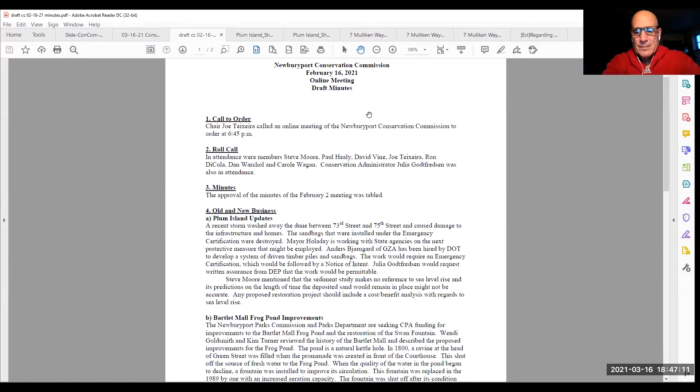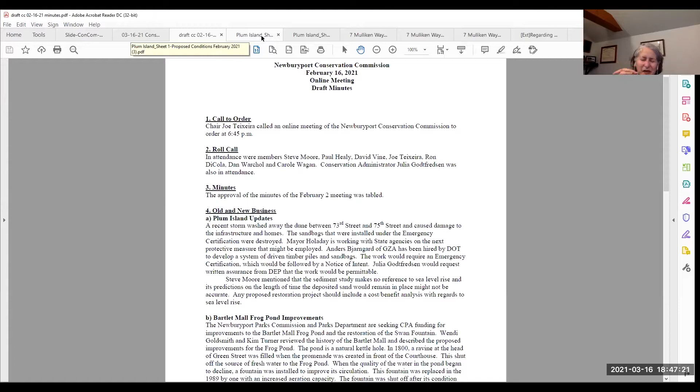All righty, next item, where am I looking at this? The Plum Island updates are going to equal the, I think, the Reservation Terrace erosion presentation. Yes, so. Okay, so we have with us tonight Mayor Holaday and Anders Bjarngard from GZA, who will be available. I believe Councilor Zaid is here too. Mayor Holaday and Anders were prepared to give a short overview of the proposed project out on Reservation Terrace.

So let's see, I'm going to make sure that they're unmuted. And I'll move to the draft plan. So we had a meeting last week with Mayor and Anders to go over this draft plan, which some of the neighbors have already seen in a meeting we had by Zoom on Friday. But Anders, if you're here, or Mayor Holaday, do you want to give a little presentation?

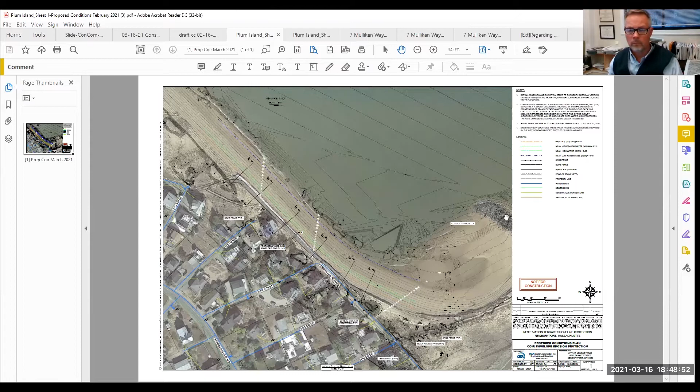Let me just start briefly, and first let me just hold on one sec. There we go. First of all, let me just express my apologies for not sending out the Zoom to any members of the Conservation Commission for Friday. There's just been so many meetings and so many moving parts on this. It just was an oversight on my part, and I apologize for that. The meeting was recorded so that it is available to view.

But we've been before you to talk about super sacks, and they did help in terms of the damage that could have occurred out on the Reservation Terrace area, but they certainly did not perform the way we had anticipated. Even though we finally were able to get the state DCR at the table to talk about what has happened for years on this property, even though we attempted that probably 5-6 years ago when we brought legislators and the world out to walk the site when we still had a dune there. And it's unfortunate that we didn't move faster at that time, because we wouldn't be in the situation we are in.

Even a year ago November, when I had predicted we would be here, we brought MEMA and the state and DEP and the world to a meeting in the conference room at the wastewater treatment plant, and then a site walk. And everyone stood there saying, oh, this is so awful.

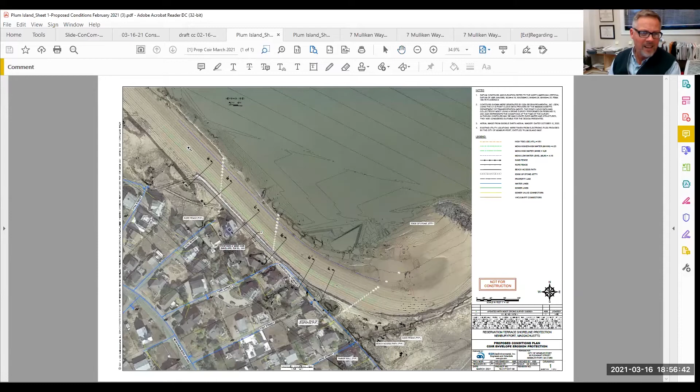Julia, if you could go—let me first just explain the limits here. It's a little bit hard to see, but there's a gray line. Thank you for zooming in. And it basically follows the former sandbag barrier. It goes a little bit past it on the southeast end there, down by sections E and F.

And what we're doing is we're tying into the higher remnant dunes there and terminating the barrier at those locations at the north. So the overall length is about 510 feet.

One of the things here, we're using contours that were generated from MassDOT's drone flyover. So you see some funky lines over the water—that's because they're getting reflection—and also some funky lines from structures over here. But the topo on the beach is good, so that's what we're using.

That topo indicated that we had lost, no surprise, some additional beach since the last time we surveyed out there last summer. So please note these cross sections here, A through F.

I'm going to go to the profile sheet, Julia, if you would, and just show you what that looks like in our proposed design. So from top to bottom, you have cross sections A through F, and A and F are basically where they tie into the existing dunes.

So the majority of the installation is represented by these sections in the middle, sections B through E.

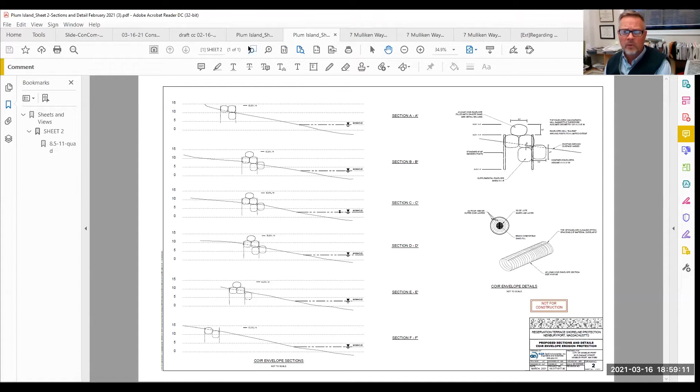In the upper right-hand corner, you can see a slight blow-up of the installation. That dashed line that slants from left to right, that's existing grade. So everything that's shown below existing grade is dashed.

So these envelopes are lined, they line the excavation and they backfill the sand. Sumco went out there and took a look at it. They feel that there's plenty of excess sand stockpiled along Reservation Terrace to fill these bags. However, the plant, they've already provided us with a unit cost to be used for imported sand if that's needed.

And we're trying to hold this elevation of 14 at the top, and that's maybe not as high as we would like for overtopping protection, but to go higher with the way the beach is lowered right now would basically take another row and another pyramid. So you'd be looking at 3 more envelopes at a minimum to get up to around elevation 17.

That would help a lot for overtopping, but it just expands the project to a point where you'd have to question the cost and the fact that it's a short-term measure, whether that makes sense or not.

For comparison, this is about where the super sacks ended up. It was about elevation 14. So the level of, or the amount of overtopping, would be comparable to what we had with the super sacks.

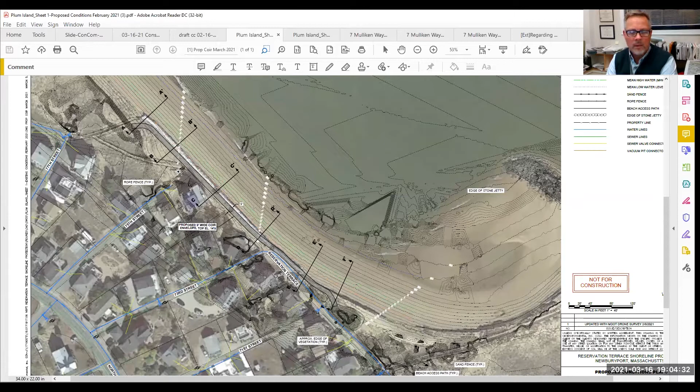So yeah, I hope that answers your question.

Well, I thought right around 73rd Street, I thought the concrete blocks were basically right on the edge of the pavement. They are there, yes, you're right. And they're more aligned with the back of our barrier.

Okay, so if you see the, northwest of 73rd, they're along the front side. But then as we have to swing out to miss the water line there, they ended up on the back.

And I would propose that we would put the blocks back in approximately their previous location, but underneath the middle of the sand barrier in that location.

So if you want to go back to the profile, Julia, one more time, that might take that supplemental envelope that you see on the bottom in the middle, and that could be replaced by one of the old concrete blocks. So what would be supporting your 3 rows of sand, the left-hand one, which if the concrete blocks are where the bottom is, what would be supporting that upper one?

The upper one on the left there would be supported by sand.

Wouldn't the coir bags be more stable than the blocks in a situation like that? Because they're longer and heavier? They're not heavier, but they are continuous. And this is one of the big differences between this approach and the super sack approach.

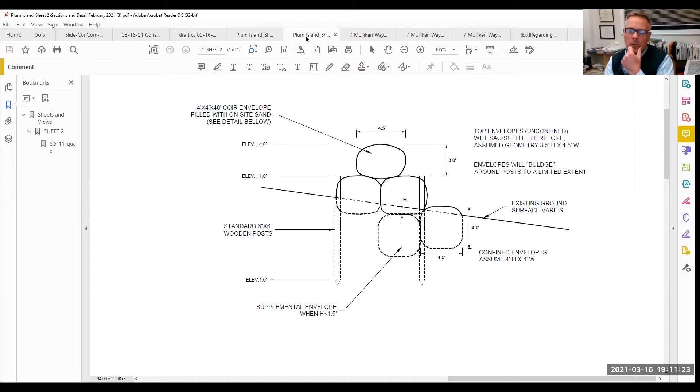But yeah, I mean, it's Mother Nature. We don't know what kind of storms we're going to have between now and when that nourishment takes place. So one of the good things about the posts is that it does hold the envelopes in place, so that if they do get undermined, they kind of drop down. They don't go seaward, which is a real good thing.

And sometimes these installations are looked at when the coir envelope fails. When I was speaking with DCR on this, who we've also been coordinating with in addition to Mass DOT and Sumco, their view on this kind of installation is that the coir envelopes will fail and deposit their sand, and then you go back in and put in a new one, and that's just sort of an ongoing process.

That's not what we're looking to do here. This is a temporary installation. Right. Because it's a temporary installation, and we really need it to get us to the fall, if indeed the river is dredged in the fall and the sand can be put on the beach, that would sort of take the place of the use of these, I guess, at that point.

So I guess my question is, given now that we know that the MEPA review process is necessary, what's your experience with getting through that, and how quickly do you think that can go so that we don't waste -- I mean, it's March already. You need these things to do some good before the fall, otherwise it's not worth it.

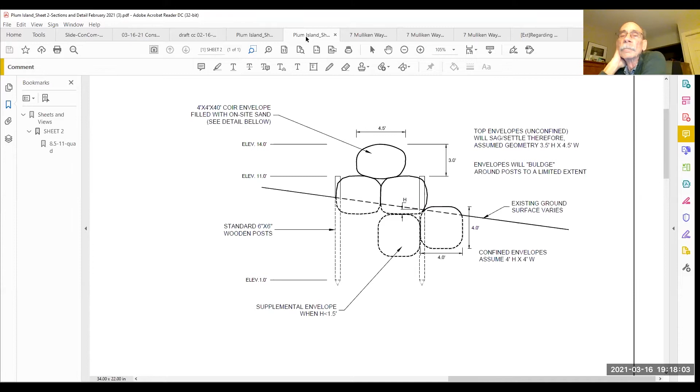Okay, and with a little help from Mother Nature, if she takes it easy on us, these could survive. In Sandwich, there's a little confusion about how well they performed down there, but they hung in there pretty well for 3 to 4 years. So depending on what gets thrown at this thing, it could make it, you know.

Well, there were some coir bags installed down in Newbury a number of years ago. I don't know how long they lasted. Do you? They're still there. Yeah, they've taken a little bit of a toll, but they're still there. They've been there quite a while.

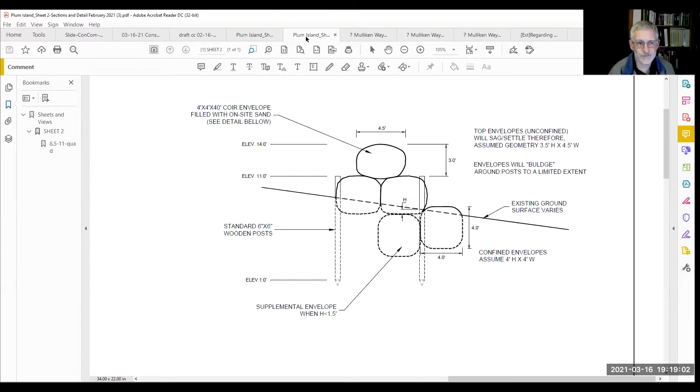And we look at those off of Dr. Hermani's house, remember? We put all the coir bags in there too, and they're loaded with sand at this point, and those are still intact. That's all the sand that was going down the river. It should not have left the Reservation Terrace area.

All right, okay, so what do you think, Anders, when should the commission expect to get you on the agenda with a notice of intent? It's this Friday or next Friday is your filing deadline for the next meeting. This Friday is the filing deadline for the April 6th meeting. Okay, all right, that's what we're gonna shoot for. You can just communicate with me on your schedule for that by email.

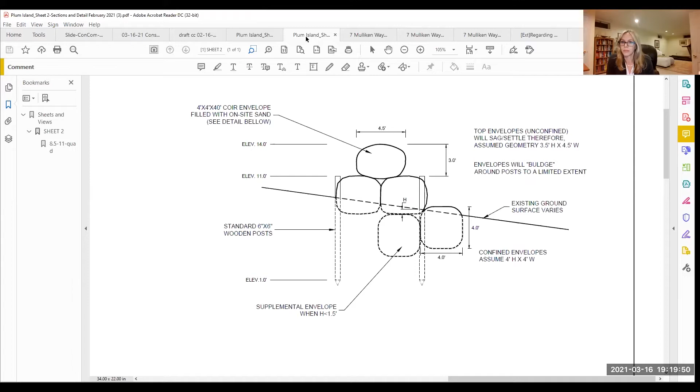Nope, I'm just here observing, and I just was going to be available to answer any questions, non-technical in nature, but I attended the neighborhood meeting that was held last Friday and have some of the similar questions from residents about the longevity and durability of this solution. So those are ongoing discussions, but I appreciate the commission taking the time to have what turned out to be an early look, which is not a bad thing, and hopefully gives you a heads up of where things might be headed. So that's always a good thing.

Is that one other question about the posts? Do you think they're buried deep enough if we get scour?

I do. If it were a permanent installation, I might take them deeper, but I think it's appropriate for this. I'll be honest, it's not like we did our typical engineer stuff and looked at the force on it, it's really not conducive to that kind of quantitative design. It's more of a judgment thing. So I will say that we took them 2 feet deeper than Sumco was initially thinking. So I think we're okay there.

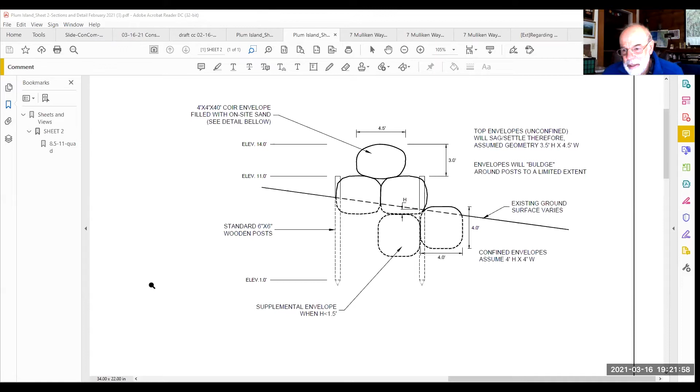And will that be from the beach side, or are they going to be working in the dunes anywhere to do this? No, there's no dune left there except for the ends. And when they get to the ends, they can work along the barrier and back out to avoid tracking up any existing dune. They will be on the beach, but that's just intertidal and wave run-up zone at this point.

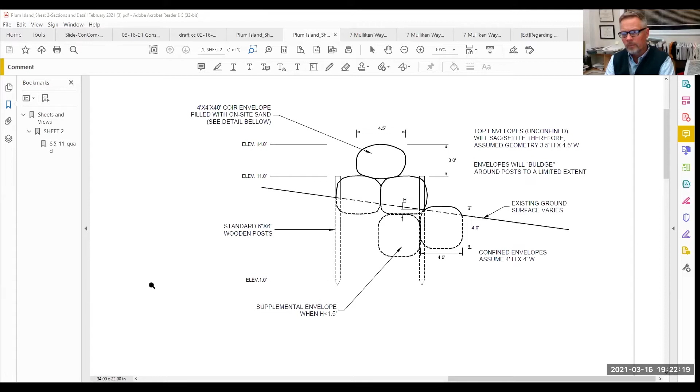When the commissioners have all finished with the questions, we do have 3 members of the public who have their hands raised. Now 4 and now 5. All right, well, why don't you let the first one in, Julie?

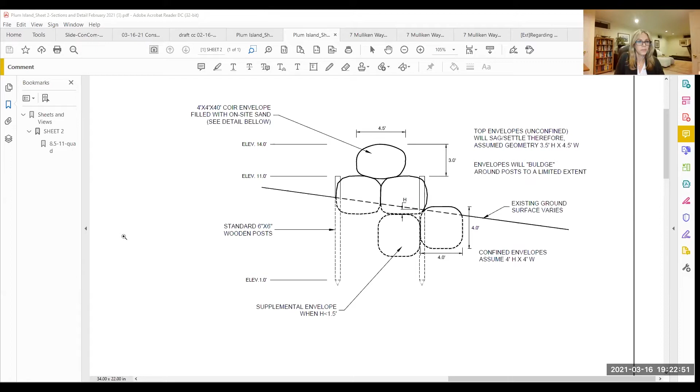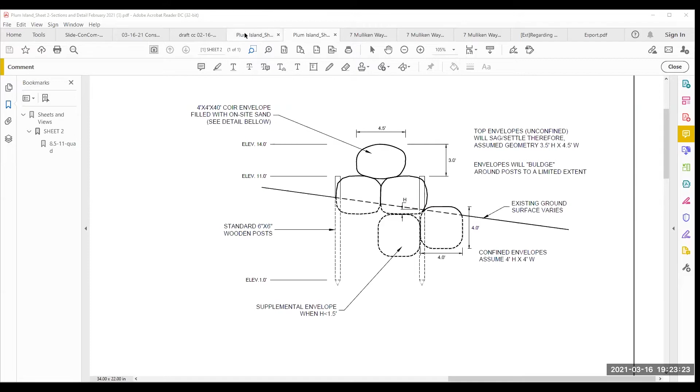Okay, so I have a question. I live on 69th Street, and during the last storm there was a barricade put up, right? So when that barricade stopped some water, it also caused more water to come in our direction. Down 69th Street there was a ton of water at high tide. And I am concerned that the whole water and sewer system issue is going to happen on 69th Street if you do not extend those barriers to 69th Street. To me, it's basic physics.

Yeah, I went out and took a look at that, and there is evidence clearly that it overtopped in that area between just a little bit northwest of 69th Street to 71st Street, and I have video of it coming down. And I'm about midway down 69th Street, and it actually came into my yard and flooded part of my yard. So that whole stream of water is coming because you're putting a structure there. So when the water comes in, it's going to go to the left and it's going to go to the right, and what's going to happen is it's going to erode the berm, and you're going to cause more problems further down Reservation Terrace and 69th Street. So when you're considering this project, I suggest you bring it as far as 69th Street. Otherwise, you're going to have a whole new set of problems.

Okay, well, let me just explain one thing here that puts the big picture into perspective. The height of the existing dune between 71st Street and 69th Street is about elevation 14. That's the same elevation as the top of this barrier. So if we were to extend the barrier there, we would probably want to go higher, right, to have it do something. And if we go higher there, then what do we do with the rest of it?

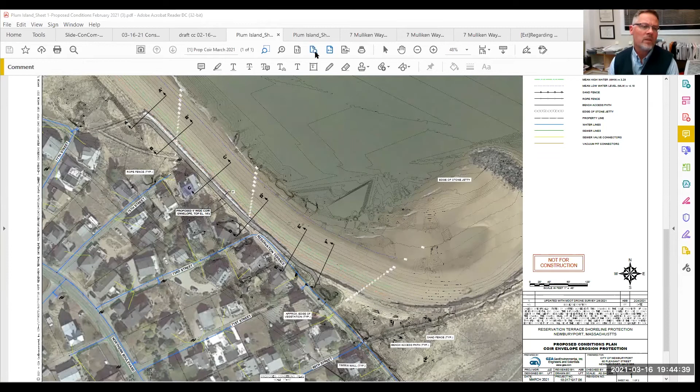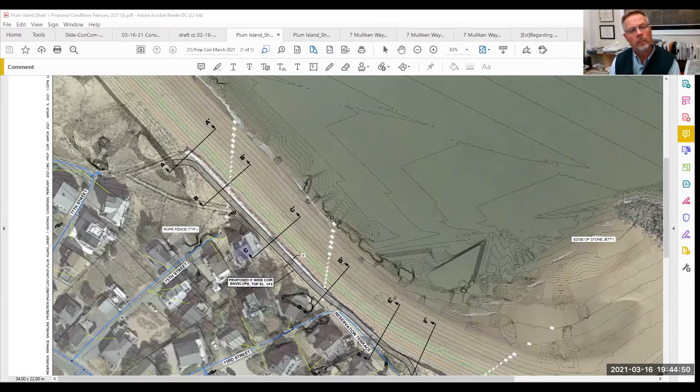Okay, the first question was how far down towards 77th Street? If you can see the plan there, it goes about a little over halfway between 75th and 77th Street, and ties into an existing dune. So down where that A is? That section? Correct. Yep, okay.

And does it taper down as you reach the end, or does it hold its elevation at 14 feet? It kind of goes into the dune. Okay, yeah, okay.

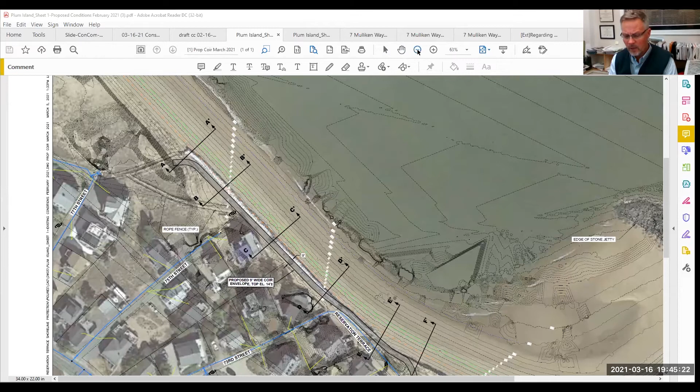And your second question there, yes. So with the posts in place, if a bag tears or fails or scours and sinks, you would have the ability to go out there and put another one in. But if the dredging didn't happen, could you add to the bags that are there and go a little higher for the winter? I'm just thinking worst case. Would you need to put larger poles in place to hold?

Yeah, you could. If you needed to, you could probably go higher. Uh-huh, okay. I think that's what he was asking earlier. I could be mistaken.

Okay, thank you. All right, thank you. All right. So you're gonna make an effort to get us this by Friday? Correct. Okay.

And I mean, I will discuss with the city the concept of extending the barrier starting tomorrow morning. Okay. And just how long do you think that would be? Another 100, 150 feet? Yes, that's a very good estimate, I think, actually. Okay.

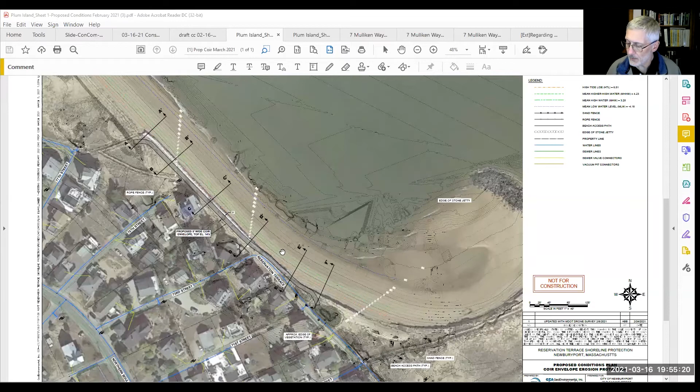All right, next item would be certificates of compliance and requests for determinations, but we have none this week.

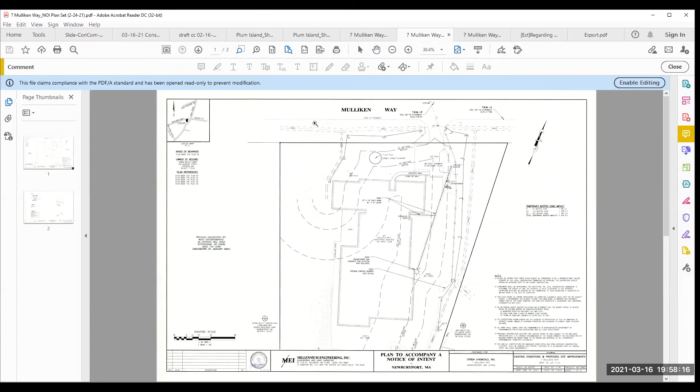To introduce myself to the commission, my name is Matt Steinell. I'm from Millennium Engineering. The project before you tonight is a utility project for the property located at 7 Mulliken Way, one of the Strem Chemical facilities.

You'll see here near the upper right-hand corner, just right of the existing driveway, there is a utility pole where the overhead wires are coming onto the site from the roadway. What the applicant would like to do is come down that utility pole and go into the ground with a 4-foot wide trench with some conduit bank and run a new service, as you see the dark line running across the pavement there, over to the transformer located at the back corner of the building, as well as another duct bank coming in midway over towards where it says sprinkler service.

It's all trench work. The first 25 feet of trenching is in a grassed surface. When that is performed, it will be finalized, backfilled, loamed, seeded, and properly stabilized. The remainder of the trench is in paved surfaces in the existing parking lot. That will be saw cut, excavated to the depth required to install the duct bank, and then backfilled. We have a detail on page 2 of how they'll properly patch that pavement to bring it back to a usable condition.

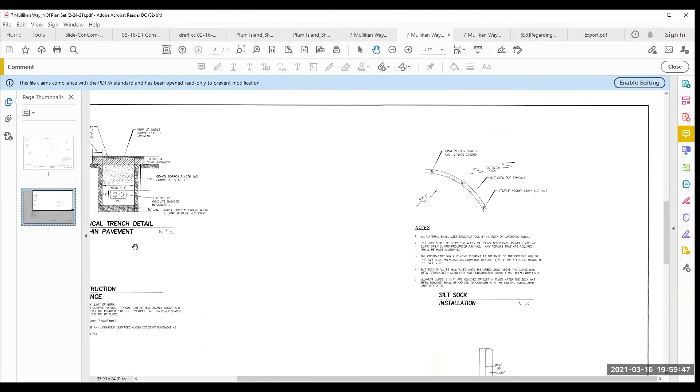Page 2 also has erosion control details and a bollard detail. On sheet 1, we identify that there was bordering vegetated wetland delineated on the site in January of this year by West Environmental. The only other resource area we found, which doesn't really exist, is the FEMA flood zone X, an area of minimal flooding. So the only real resource area here under jurisdiction is the buffer zone for the bordering vegetated wetland. With the proposed improvements, we're expecting approximately 900, I think it says 920 in the corner, square feet of temporary buffer zone impact.

Otherwise, it's a pretty straightforward project, all in previously disturbed areas, and I'd be happy to answer any questions the commission has.

Julie, I don't know if you've checked already, but just before the meeting started I sent you the green cards and the legal ad by email so you could have that for your record. Okay, thank you. I did notice also today that DEP issued the file number, which is 0511048, and they had no comments.

Again, this is because it's buffer zone only, it's a temporary impact, a minimal project, but some of that temporary impact is in the 25-foot no disturb zone. Although in this case, because it's not a permanent impact, there will be no actual permanent disruption of vegetation, hydrology, stormwater flow, or anything like that. I don't believe this would require a variance.

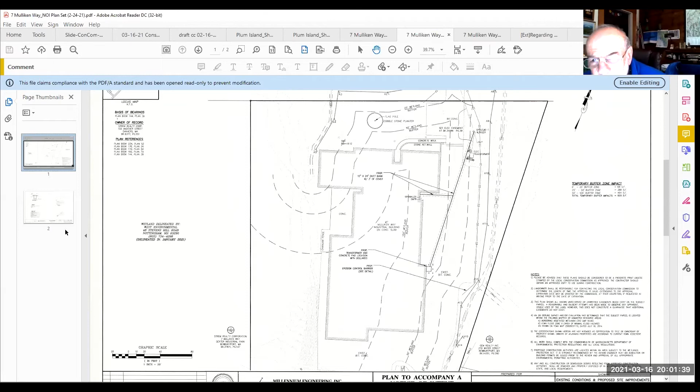Is that the part which looks to be pretty small in the 25-foot no disturb zone? Is that already disturbed? Well, it historically has been disturbed. Right now it's a grass lawn, maintained and mowed, but I think this whole area we all know has had significant alterations over time.

So no vegetation other than lawn grasses will need to be removed and replanted? That's correct.

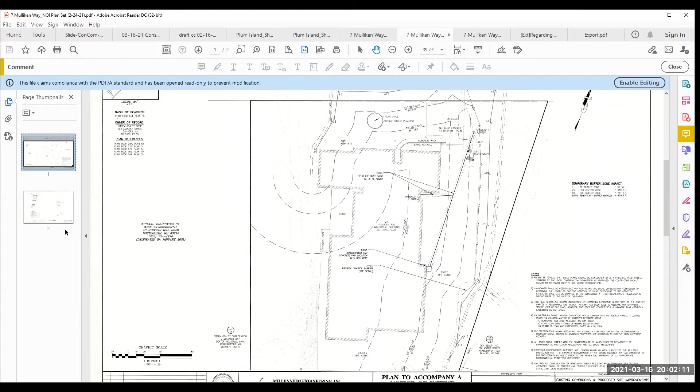If you zoom in right by where that utility pole is, you'll see there's a transformer with a couple shrubs, and it's specifically designed to go to the side of those. And then there's the little bollard symbols there that will be installed as well.

Is there a stockpile area for the excavation? We don't have a stockpile area specifically shown on the plan. We can do that just on the sides of the trenches. This isn't a very deep trench. On the side opposite the wetland, between the pavement and the trench itself, we're talking about a 4-foot wide trench going down about 4 feet deep. So it's not an incredibly large trench. We can do it on that side. Therefore, any erosion, there should be none. This can all be done in a day. Any erosion that would occur on that side would have the actual trench itself protecting the resource, in addition to the erosion control between us and the resource area.

Yeah, that was going to be my question, if you're going to be doing it in one day. The portion that's in the grassed areas, I think, can be all completed in a day. The applicant is here as well, and he may have some more insight on how quickly the overall project will take, but I think the trench in the grassed area, where we have to concern ourselves most with destabilization, can be all done in a day. Okay.

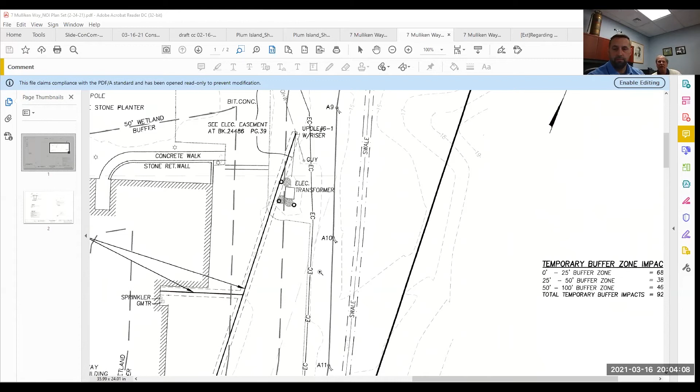Sure, I understand. Robert, I don't know if you want to speak up. No, I can't imagine that would be a big deal. We've done that before. When we did some work in our back area, we put in like $2,000-3,000 worth of shrubs in the wet areas, and they were very happy. We would have no problem doing that.

Okay, so in the area directly to the right of where the electrical transformer is now shown on the screen, we have the erosion control line. Would you be looking for something like a buffer zone or barrier to the actual resource by putting a facultative wet plant along the wetland line, or are you looking for something more spread out throughout the site?

Well, trees tend to do a better job with water uptake and delaying water too, like little detention basins. Whatever you prefer. Yeah, but I would agree that the plantings would be best within that 25-foot no-disturb buffer zone, to give some habitat value and better buffer zone qualities to those areas. So, like Joe said, trees are typically a little better than shrubs.

Sure, we could come up with a list of a couple different trees that would be appropriate in that environment and in that relative proximity to the resource area, and get those approved through Julia before installation. I'm trying to narrow down where the commission is looking to have them placed so I could estimate a number of plants needed to cover that area.

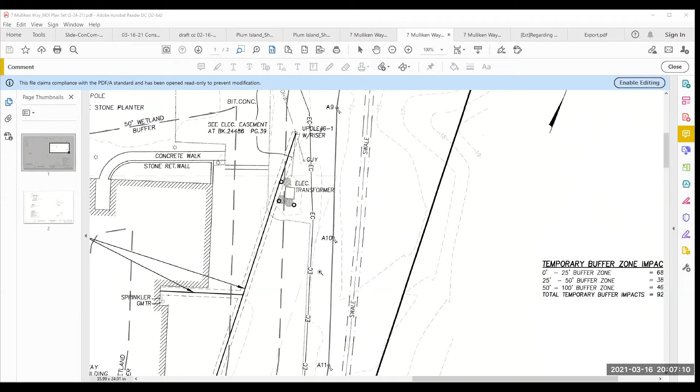So why don't you, Matt, put together a sketch of where some of those trees and/or shrubs would go and what appropriate species would be, and send that to me. That's something I could approve, if the commission agrees, prior to issuance of the order of conditions. What I can do is update this plan with some plant symbols and species, showing where they are. I'll run them by the applicant to make sure they're comfortable with the placement, especially considering the pavement areas and utilities in those areas. We want to make sure there's no interference, and then we'll get that over to you. Sounds good. Okay, good.

All right, you have anything else? I do not. Okay, thank you. We don't have anything else—anything from the public? Thank you.

And Margaret Ann has her hand up. I think that's left over from before because she logged in twice as two people. All right, in that case—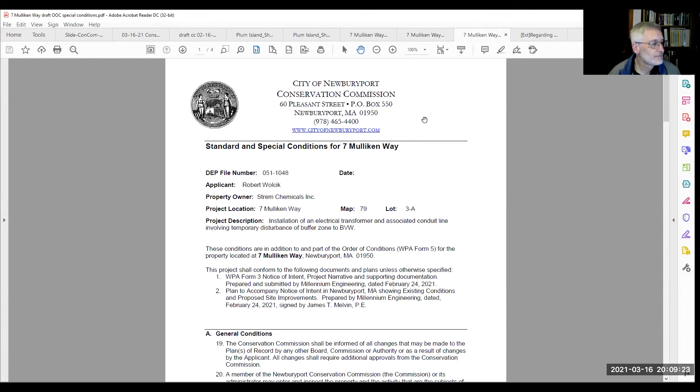I have a draft order of conditions, our boilerplate language. I didn't hear any discussion of special conditions because it was a relatively straightforward project and they had all the appropriate things shown on the plan except for the plantings, which he's going to get to me prior to the issuance of this order of conditions.

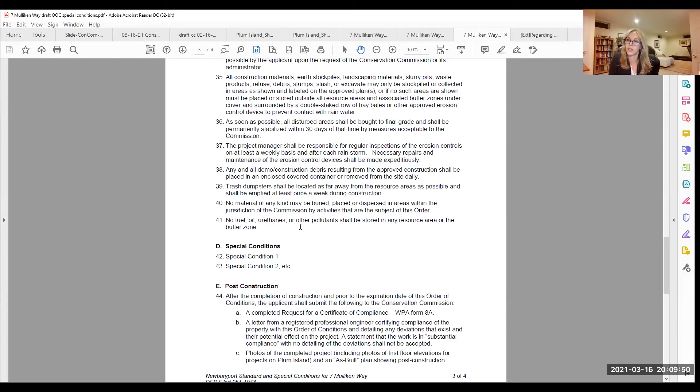So unless anyone has any conditions they'd like to add right now, you could vote on these as is. You're gonna reference something as far as bringing it back to the plan though? Yes, that he has to submit a revised site plan showing proposed native plantings within the 25-foot buffer. That would be a special condition.

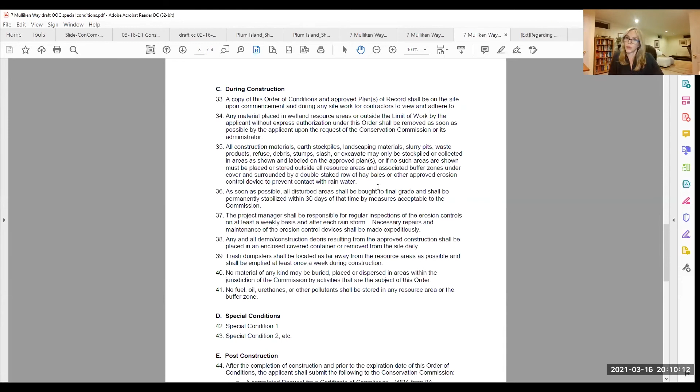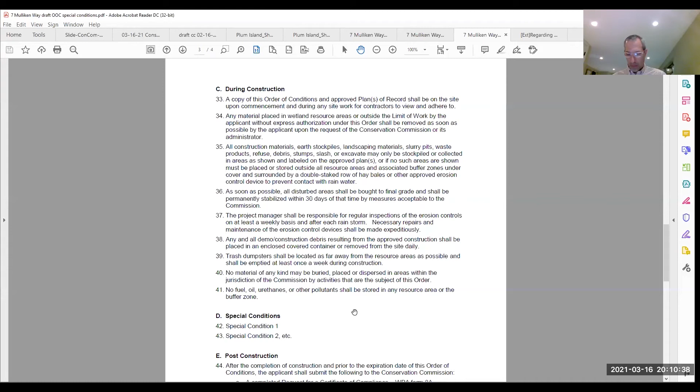Anybody got anything else? Got a motion? Motion to issue an order of conditions? Second. Roll call: Paul Haley, yes. Steve Moore, yes. Dan Warshall, yes. David Vine, yes. Ron DeCola, yes. Carol Wagon, yes. And I vote yes.

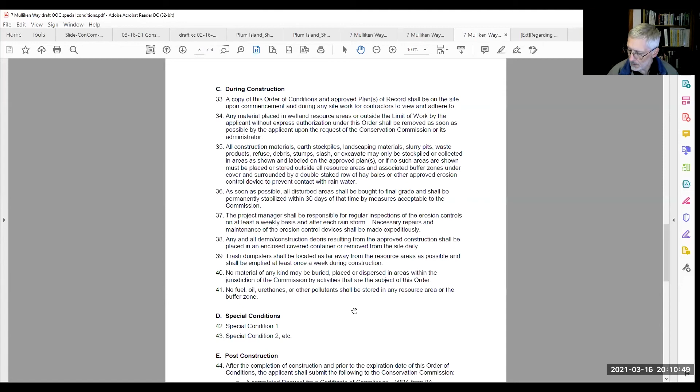All righty. Next item are enforcement/violations. First one is 11 76th Street.

Did we not get anything yet? We did not get anything yet, but I did hear from Tom and he anticipates it coming in for the April 6th agenda. Okay, so he's got until Friday?

He's got till Friday. So I'll send him a reminder. Just to refresh my memory, wasn't this due at our first meeting in January? Yes. Maybe in your reminder, mention fines. Okay, I can do that. Yeah, it's an enforcement order and it's been plenty of time. Right. So, yep, I can do that. Okay.

And this is where I recuse myself and I am going to log out of the meeting. I will see you guys April 5th or April 6th. Good night. Good night. Okay, thanks, Joe. Bye. Okay, then the next item, Steve, you want to take over?

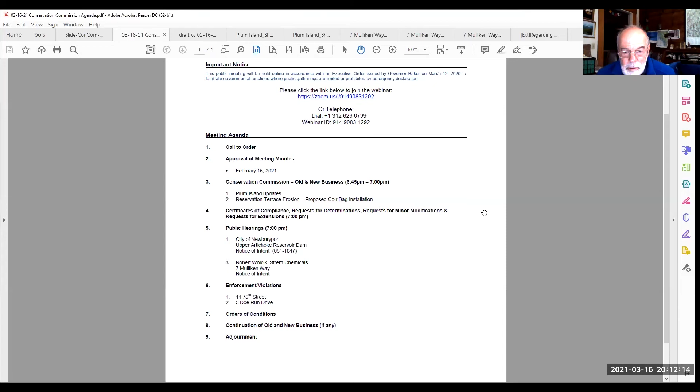Yep. Next item is 5 Doe Run Drive. I believe the resident is present. Okay, let me see if I can. All right. If you are Leon Andoni, okay, I'm going to. Leon, I've just promoted you over to the panelist position, so you should be able to unmute yourself on your computer and we can discuss the issue of the wetland behind your home. Is it possible for you to unmute? Yes. Okay, great.

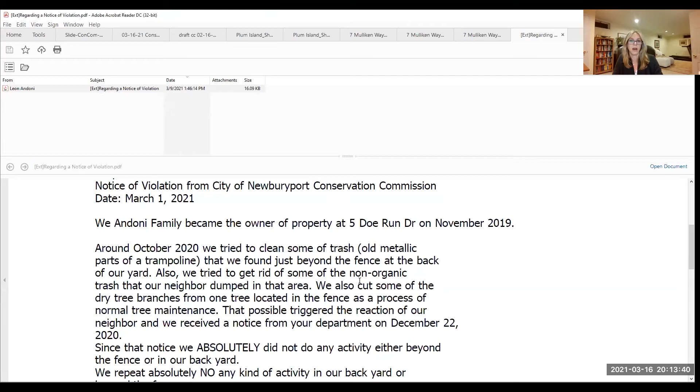This enforcement order, well, it's not really an enforcement order, it's a notice of violation that was sent to Mr. Andoni at the address of 5 Doe Run Drive because neighbors had indicated that there was cutting of vegetation within the wetland behind 5 Doe Run Drive. So I sent a letter and then a notice of violation to the Andonis, and Mr. Andoni responded with an email, which I forwarded to you all, indicating that they had been removing old trash back there, parts of trampolines and things that they had found on their property behind the fence, and tried to just clean up the area. They said they did cut some of the dry branches from one of the trees, which was located in the fence. So they were essentially doing some maintenance back there in their property, but they stopped once they realized that there was concern about it.

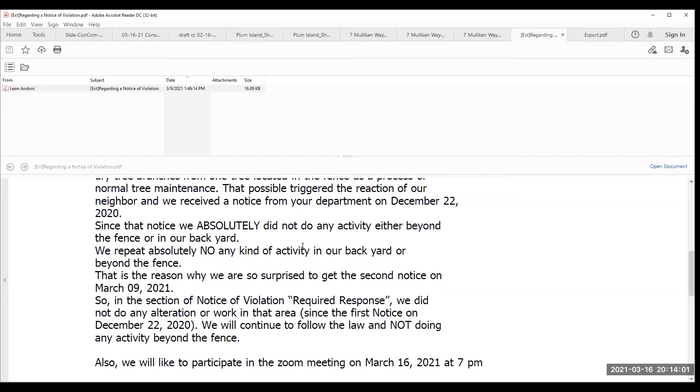So, Mr. Andoni, is there anything else that you'd like to add here? No, that's all. So I think you certainly are allowed to go out there and remove dead vegetation, and if there's debris, metal things and remains of other structures, that's perfectly fine. But cutting any live vegetation is not permitted. And it's kind of hard this time of year to tell what's live and what's dead.

I know, exactly. So I think if you want to go out there and remove any dead stuff, if you waited until there were leaves, so you could tell the difference, that might alleviate some of our concerns. Perfect, thank you. But yeah, doing something this time of year, you can't tell whether it's dead or alive. It's difficult.

Okay, thank you. Does anybody else have any comments they want to make? No, I think as long as he's aware now that if he is going to be doing any work back there that impacts any of the wetlands or wetland vegetation, he should talk to us first. Right, yes, that's correct. Anybody else? Okay, thank you, Mr. Andoni. Thank you. Thank you.

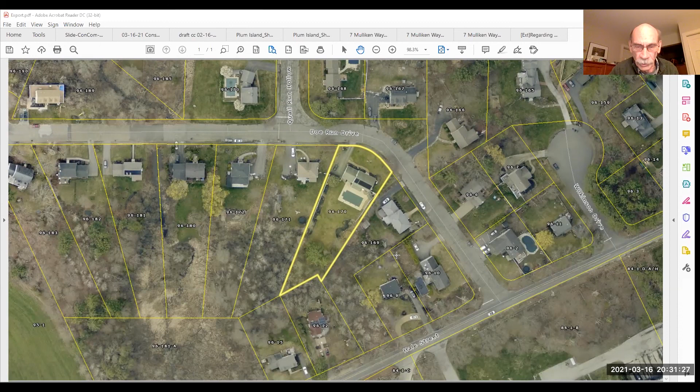Yeah, okay. Now, Steve or Julia, do we need to vote on that — the notice of violation for Doe Run Drive? We actually don't need to vote on that, Paul, because it wasn't an enforcement order. So it'll just be in the minutes that we're okay right now. Yeah, for now we're fine. Right, yeah, that may change.